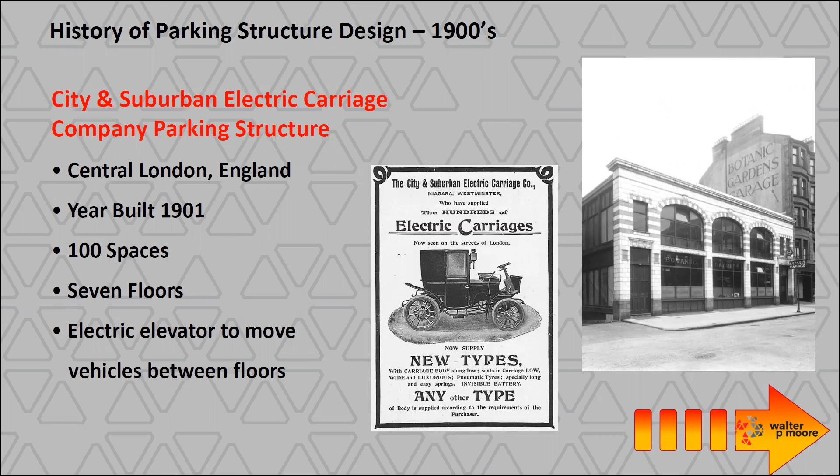In the 1930s, we see some of our first elevator type garages. They had mechanical lift elevator type systems, and this one may be one of the very first repurposed parking structures.

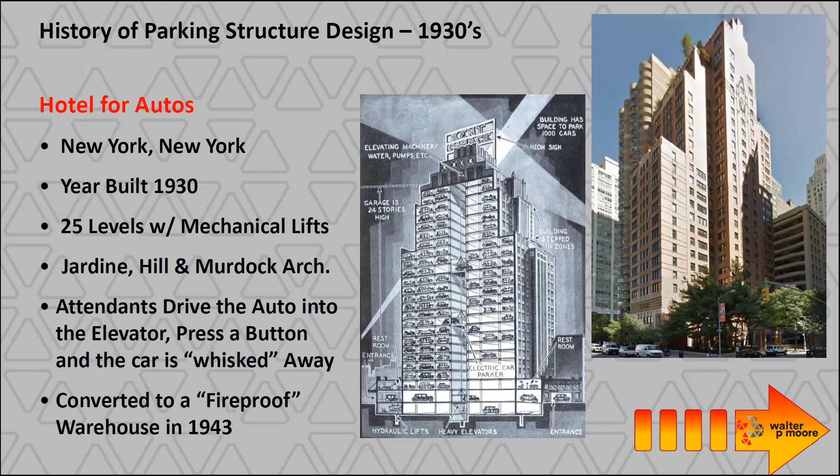In the 50s, we see more of a traditional approach to garage design. Basically, self-parking was introduced, vehicular ramps for interfloor travel. Although it wasn't the most efficient parking structure, you could really start to see some of the familiar cues with today's parking garages.

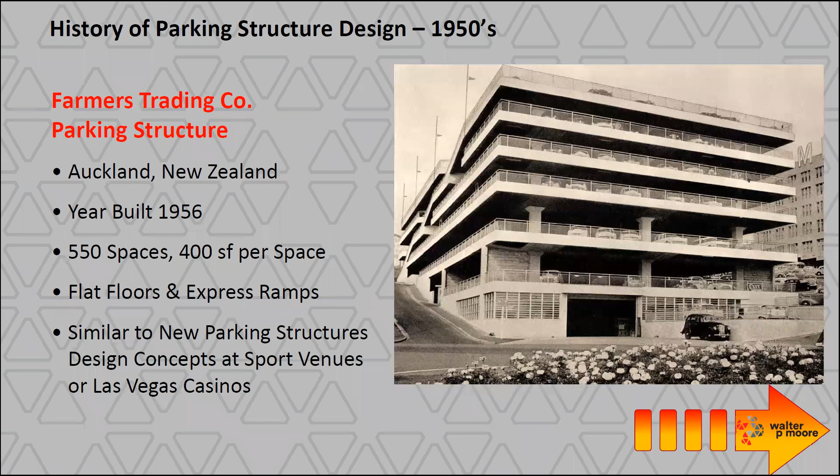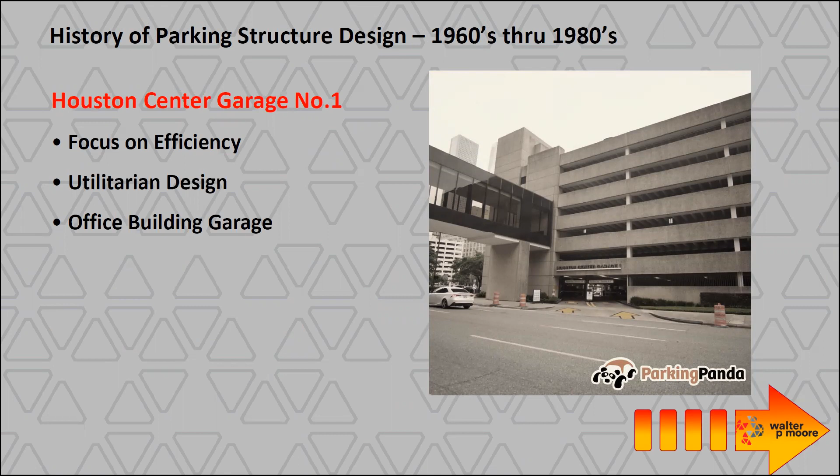In the 60s through the 80s, we saw a proliferation of highly efficient office building type garages, very utilitarian in design, pretty much serving one single purpose: to park cars in a concrete box. We also start to see some breakthroughs with long span construction to increase efficiency and, you guessed it, park more cars.

In the next 20-year period, we really see that although efficiency was still a driver, garage design became a little bit smarter. And we really saw this mass adoption of what we call level of service design approach.

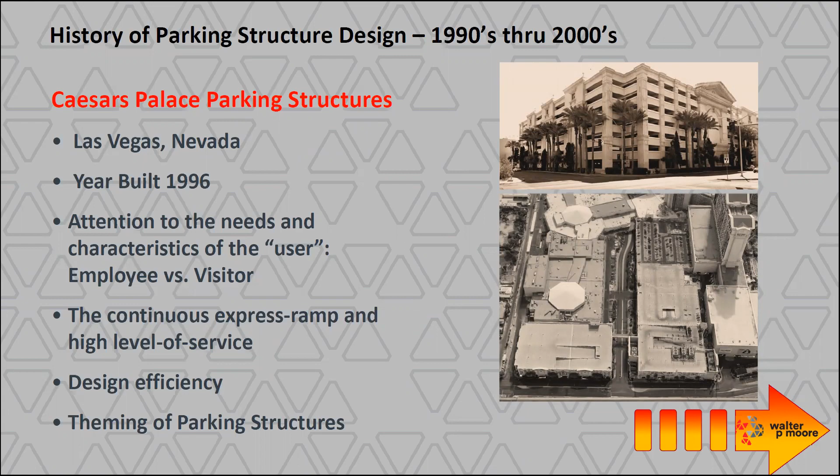Now we arrive at the modern era of parking structure facility design. We see structures that are part of the community, multi-use, integrated with other buildings. Many have sustainable features. Some are part of multimodal and transit-oriented development, and many incorporate technology to increase utilization, enhance wayfinding, and provide an overall higher level of service. And finally, we see a recent trend toward adaptable parking structures that can be designed to be repurposed to another use in the future.

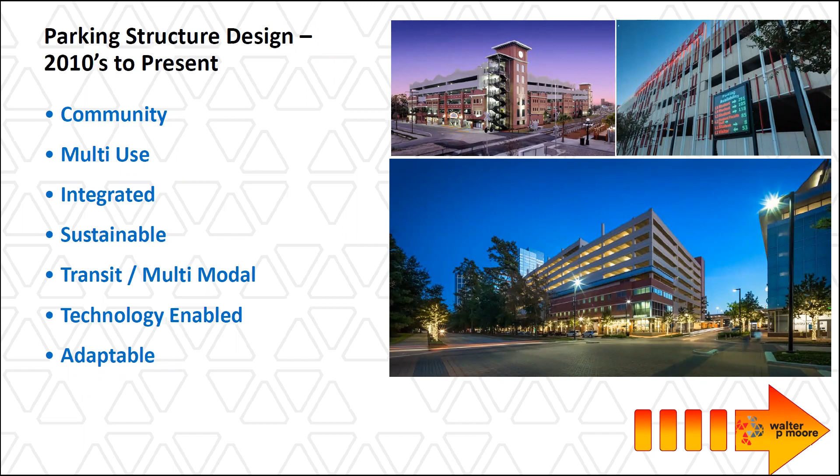Now let's go into a few modern examples that implement some of these strategies and trends that we spoke about. First example is Midtown Park Garage, located here in Houston. This overall project is a great example of how a new development with public space and, of course, parking can become the center of activity in the area. Midtown Garage is an underground garage that spans almost the entire 6-acre development, and it provides around 400 parking spaces for a variety of user groups.

Public, event, commuter parking, because it's adjacent to the Metro McGowen Station Rail, as well as the ability to support future retail on the site. And finally, the park and garage design work together with on-site water management, which is a sustainable feature for the garage. There's a 70,000 gallon water vault that was built within the garage construction footprint to capture both the park and the garage drainage, and then reuse that for the irrigation of the park.

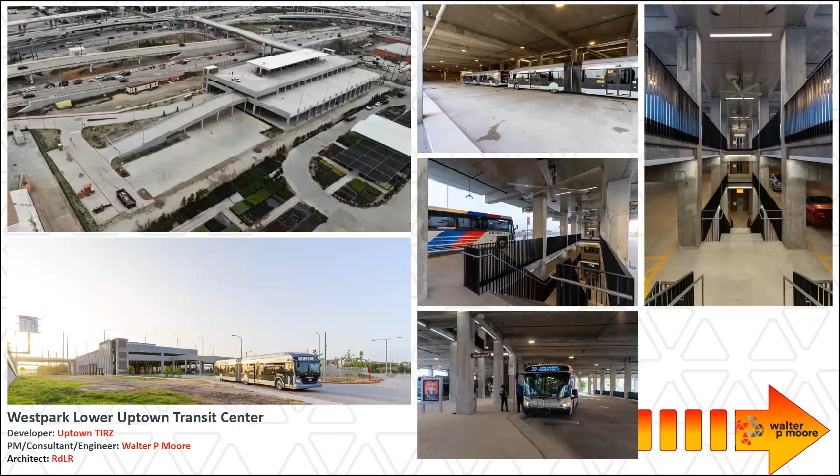A different type of trend we're seeing is parking structures that are part of a transit-oriented development, or in the case of Westpark Lower Uptown Transit Center, that are part of a multimodal hub. You have two modes of bus service, park and ride coming from the US 59 HOV, shown in the upper left-hand picture. Buses circulate on the 3rd level of the transit center. The lowest level has local bus service, which supports the newly opened Uptown BRT, and the 2nd level is an integrated commuter parking garage. The transit center also has accommodations in the way it was designed to receive other modes of transportation in the future.

This project example shows more of an urban trend we're seeing: integrated parking with another building type, in this case an office tower and retail. Bank of America Tower in downtown Houston has an integrated 1,300 space garage that's both under the tower, a podium type structure, and a large portion outside the tower footprint. This was done to allow the project to be built in phases. The first phase, the standalone garage, came online a few years before the portion under the tower. This strategy was used by the developer to start generating revenue sooner. Additionally, the garage has multi-purpose components like retail on the ground floor and a green patio space on the roof.

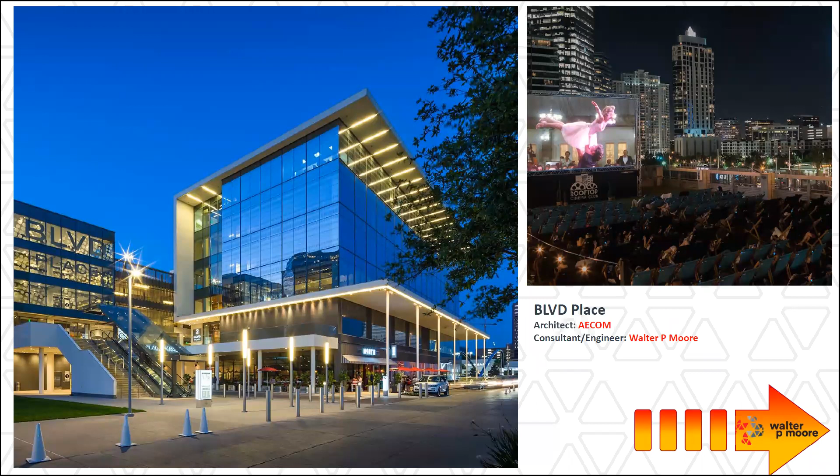The next example is a parking structure at the Boulevard Place development in the Uptown area. The garage serves a mixed-use development and utilizes the roof of the garage as a cinema club. Really, really cool idea.

The final example of using a garage in an integrated fashion within a development is University of Houston Garage 5, the Elgin Street Garage. It's 2,500 spaces that serve staff, visitor, and student parking needs, but also serves the needs of the new architecture and art school building sharing the same footprint on the same parcel of land. The multifunction space includes an art gallery and the school's maker space, so you can watch art being made through a glass enclosure open to the adjacent loop road sidewalk pedestrian realm. Additionally, it utilizes a parking count and guidance system to enhance wayfinding and increase utilization. Finally, the garage drainage system was designed to flow into a bioswale that supports low impact design for storm water quality management.

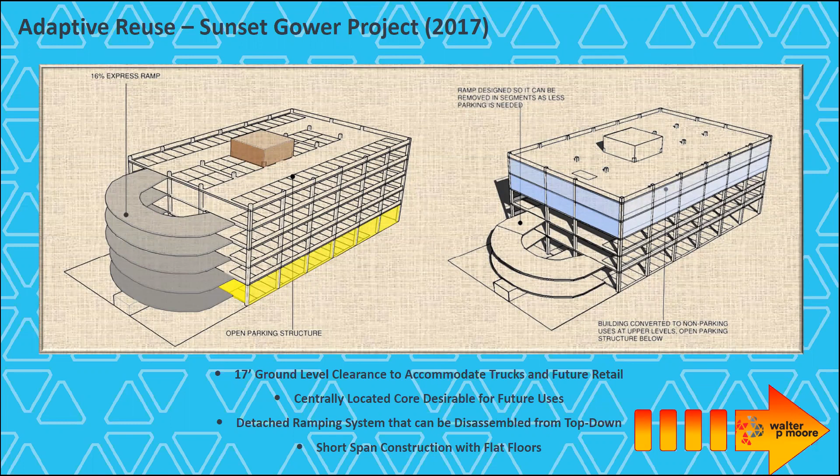The great thing about this approach is that the potential reclaimed floors are all flat, there's no ramps, and you have alignment with the structural grid and cores.

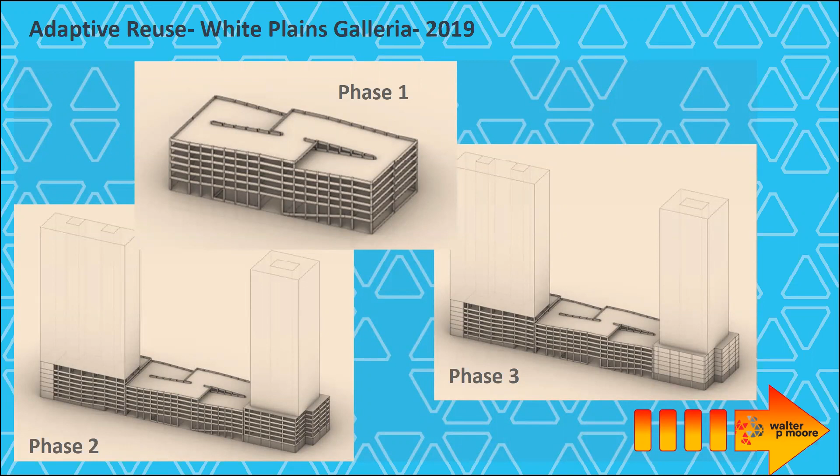There are many considerations. I won't go over them all, but this list is by no means comprehensive. However, it can be done.

This is an example, the FIU parking garage. It was designed to have the entire bay convert to classroom space as the need for it grew.

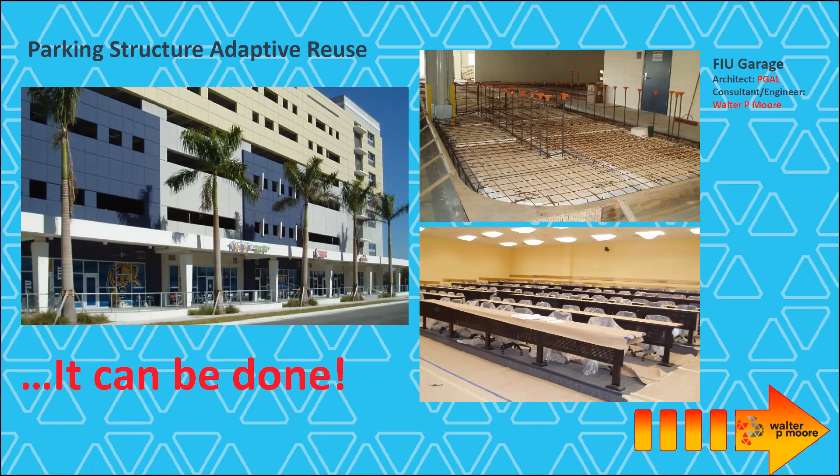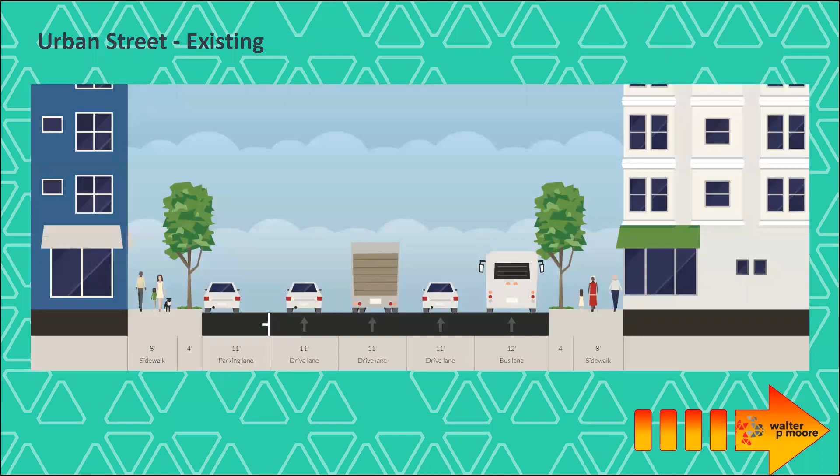Now let's quickly look at potential impacts of autonomous vehicles to our urban landscape. This sketch is of a common city street with many lanes of traffic and small pedestrian walkways.

Now, as we move more toward walkable space in urban areas, AVs start to come online, and maybe this is what the streetscape of the future could look like: fewer autos, auto lanes that could be skinnier, AV-only lanes. It's sustainable, greener, healthier, and certainly something to think about.

However, what we don't want to do is create a situation where we lose the battle with control over our shared curb space and create chaos. Maria, what are your thoughts on the importance of shared curb space?

Thanks, Brian. Thanks so much. I'm excited to be here today. Always a good time to talk about parking. So let's just dive in.

Why is the curb a big deal? How you manage your curb can really help define your city. Do you want a city that favors sharing the streets, or one that's focused on archaic uses? The curb is a valuable, limited city asset that traditionally has never been given the love it deserves.

And this is important because, according to a UN report issued in May of 2018, urban areas hold 55% of the world's population.

By 2050, these areas are going to hold 68% of the world's population.

So cities can't keep building garages and we can't keep building curbs. The old adage, if you build it, they will come, really applies.

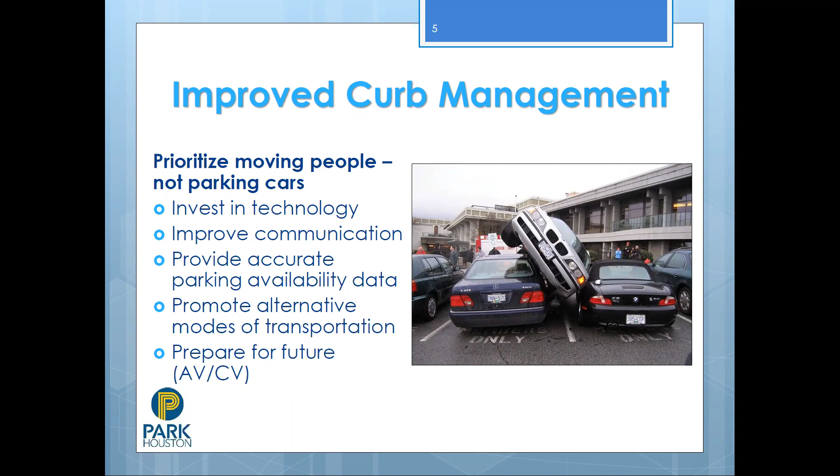So 15 years ago, the priority at the curb was protecting it for private vehicles—let's park as many privately owned vehicles as possible. Now cities have a different attitude about the curb space, and we're looking at how do we move more people, not necessarily how do we accommodate more cars. Parking privately owned vehicles is the least important use for that curb. Looking forward, that's going to continue to drop in priority as we seek to accommodate an increasing number of delivery vehicles and TNCs, and then eventually accommodate the autonomous vehicles that are headed our way.

So in the age of COVID, parking is not as challenging, and cities have taken this time to try new things with less constraint because now we don't have so much demand for the curb space. For example, many cities are experimenting with pickup and drop-off areas for restaurants that were impacted by the pandemic. We took metered parking spaces and replaced those with pickup zones so that customers can easily access their restaurants, grab their takeout, and get out of there quickly.

Some cities had started in this direction prior to the pandemic, but under the guise of having rideshare zones on the street. Clearly the pandemic made this practice more acceptable since people were not demanding that curbside as much. In Houston, we went live with some rideshare only zones in March of 2020, so the timing was not great. We converted public parking spaces—in some cases entire blocks—to rideshare only zones to accommodate the TNCs that were struggling to find curb space to safely pick up and drop off passengers in the Central Business District. In this instance, usage of the curb for rideshare was about safely getting people to their final destination or getting them to the TNC to go home.

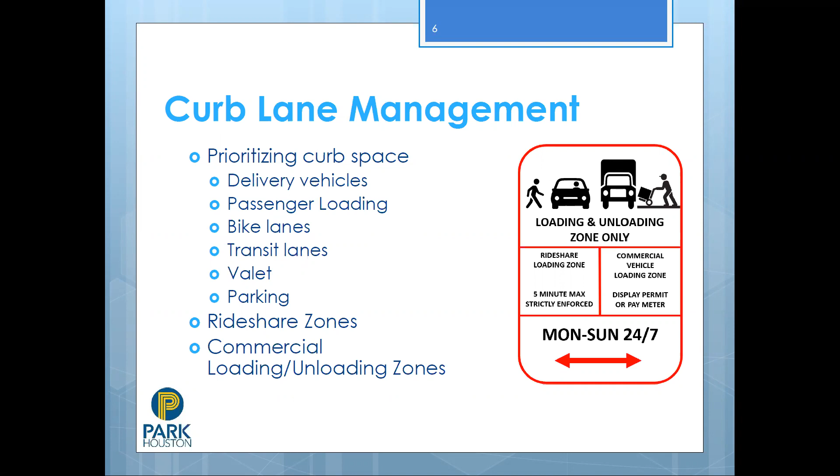We worked with the TNCs to geofence, so much like an airport, you'd walk out of your restaurant or out of the bar and call your Lyft or your Uber, and it would direct you to the zone we set up on the street. Unfortunately, our timing was just off, and we really didn't get to test it so much because the same week we went live—I think a week later—the stay-at-home order for Houston was put in place. So hopefully we're going to try and see how we can test that whenever we get to whatever this new normal is post-COVID.

So to prepare for the future, cities are looking to digitize their curbs. This is a digital tool that maps out in great detail how curb spaces can be used across the city. It would also allow street users to better understand how to use this infrastructure. And in the future, most importantly, it's going to form the backbone of crucial data that programmers can feed to connected or autonomous vehicles so they understand not only how to navigate our streets, but also how and when and where they can pull over and use the curbs.

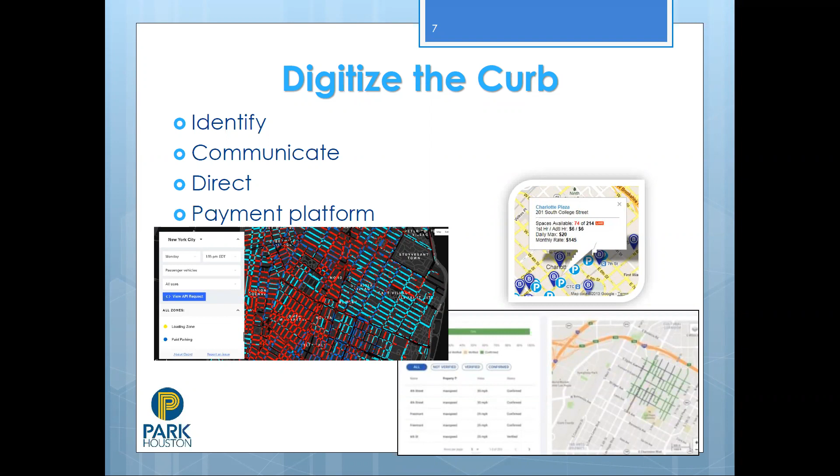In parking, we have really limited real estate to communicate with our customers—it's really just a sign on a post that we put on the side of the street, and most of the time is that sign even being read? But how neat is it going to be when a connected vehicle drives into your central business district and the vehicle knows that the empty space it just passed is reserved for commercial deliveries, but that one block over is a street that has metered parking available for its use? Do you even need to think about signs anymore? Just thinking about ideas like this is really exciting, thinking about connected vehicles coming.

So now you've digitized your curb and your customers can use an app to find available parking because you're also pushing your availability that you're getting from your smart meters to this app. So the next thing you want to do is integrate a payment platform. And Brian touched on this earlier.

You can have a pay by phone app or pay by cell app for your customers so they can pay the meters and find and pay for parking in one app. We're always going to have to pay for parking in some form or fashion, but what COVID demonstrated is that payment by app quells fears in the public, and moving forward, if a city has not adopted pay by app, they need to get that done.

But more so, what cities should also be looking at is having multiple vendors who offer pay by app. Currently, most cities, Houston included, select one pay by app operator, and our customers are required to use that app.

So we've created a monopoly in our city. But when we put a parking meter on the street, we don't say it's a Visa only parking meter or a MasterCard only parking meter. We take Discover, Amex, Visa, MasterCard, all the coins, all the bills. So cities need to offer their customers as many payment methods as possible. Why should we only limit ourselves to one app provider? Let the customer decide what they want to use. And also, you get the vendors competing against each other to get the customers.

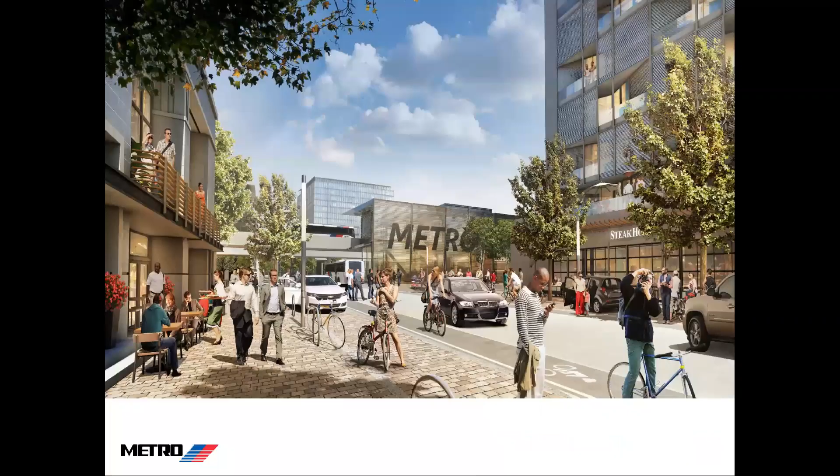This is a visualization of the Addicks park and ride. This isn't what Addicks looks like right now, but it could look like this potentially in the future.

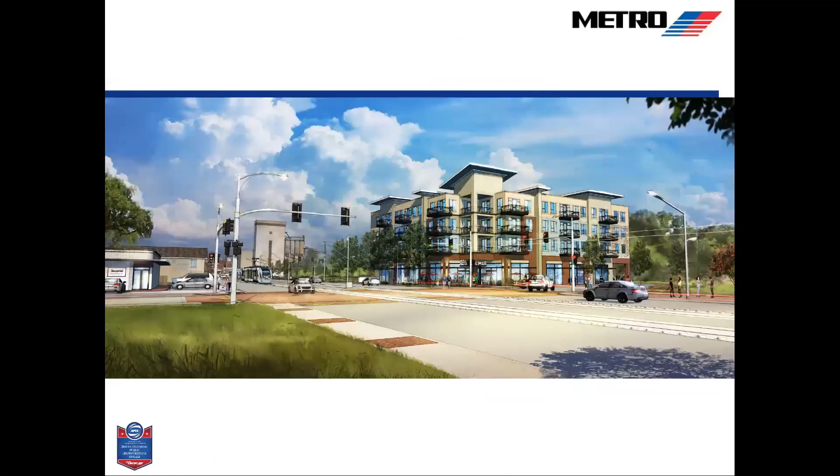Or how could we get from here? This is a visualization of potential development that could happen along one of our light rail lines, where we don't own real estate but we have the transit. This is in and around the Coffee Plant station, and you can see that in the background.

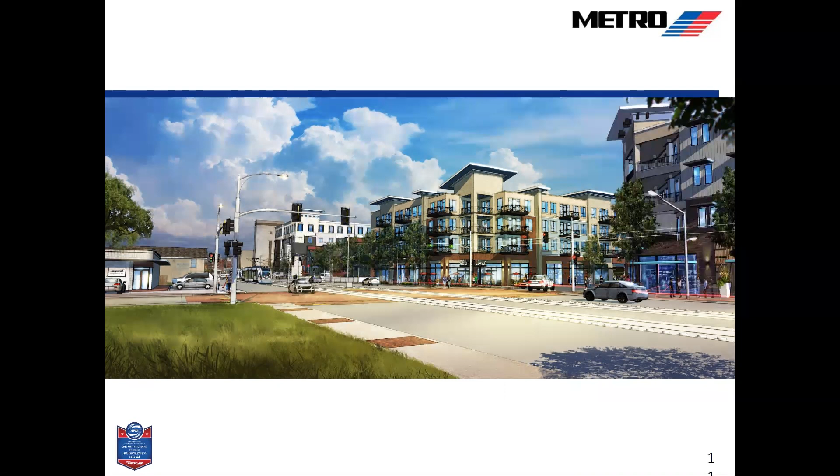This is a simulation of what densification or development around one of our light rail stations could look like. These are just two cases: the park and ride, where Metro actually owns real estate, and around a light rail station, where we bring the transit, and the transit is what induces or is a big factor in inducing development and higher densities around the transit station.

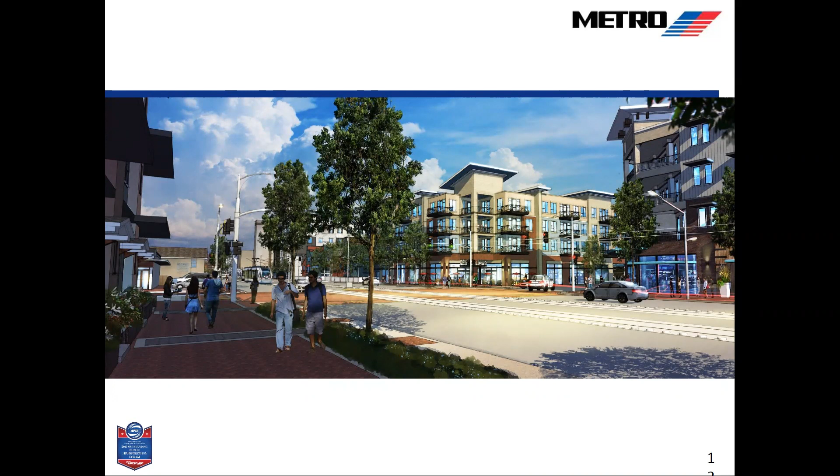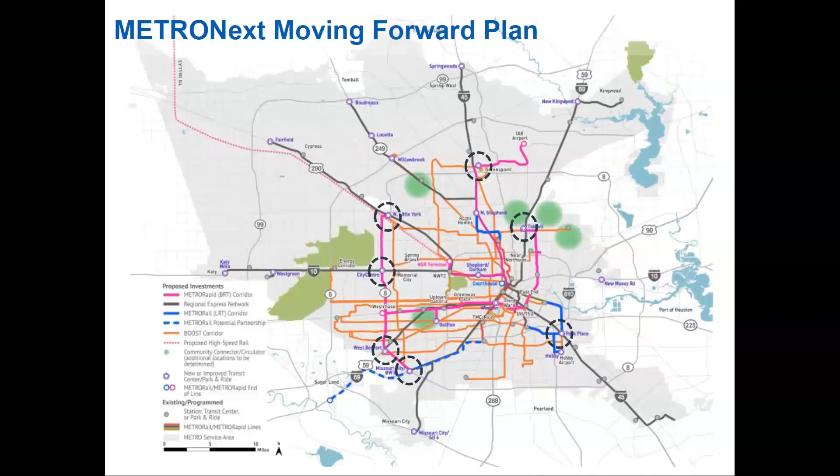So this was a very deliberate part of the METRONext moving forward plan. The way we can think about development around these hubs is that parking is one of the amenities, but it also becomes part of a set of amenities and livability principles that can develop at these locations.

I wanted to share some of the work Metro has done around this, which we call transit-oriented development. We took a look at some of the real estate we own, like the Addicks Park and Ride, and went through this exercise working with the City of Houston and H-GAC. We looked at some of our light rail stations as well as our park and ride locations, and went through this exercise of looking at how these could potentially be developed.

In the next couple of slides, I won't get into the details of the analysis, but we took a look at existing land uses, this is again the Kuykendahl Park and Ride. If we have these land uses of multifamily residential, commercial, and retail, what kind of land uses could one expect? What are some of the development trends we're seeing? What are the population and employment demographic trends, and how could all of that tie together into developing a program of spaces around the park and ride? That was some of the analysis that went into this work.

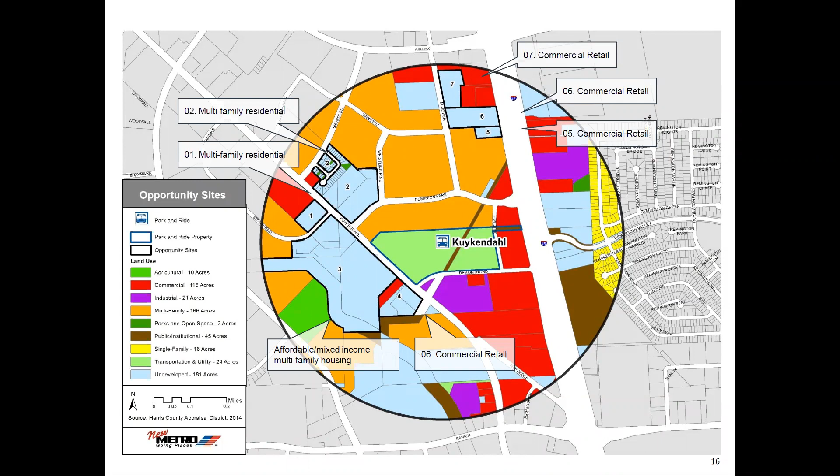We also thought about what are some of the gaps in our existing first and last mile networks, and how improvements could help connect all of these users together.

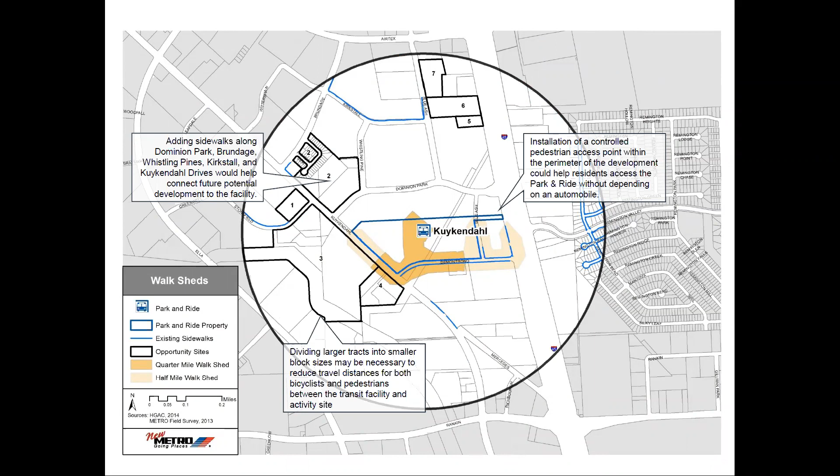The big takeaway from our park and ride networks and our TOD study was that a transit agency brings the transit to the equation, but at the end of the day it's the art and science of development where you have to bring multiple actors together. You have to identify a diverse set of stakeholders in terms of partnerships, think about development that is transit supportive, and connect multiple modes while leveraging our investment. It's a whole program with multiple actors needed to develop these livable centers and multimodal hubs.

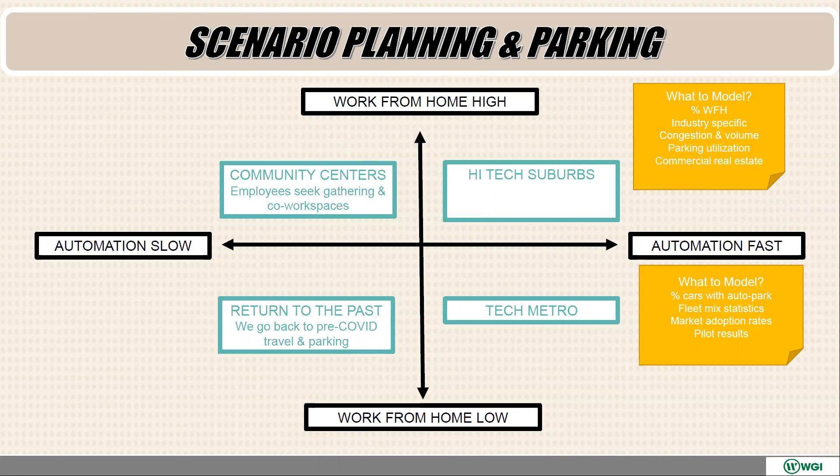I actually like technology foresight, because that's really where you're pulling out the crystal ball. As I said, a lot about technology—the real thing that matters is market adoption, and really, how are consumers reacting?

Because 57 to 75%, depending on which poll you look at, of consumers say they will never get into an autonomous vehicle. So we've got to factor those things in, but in a phased manner.

So for parking, we've got our traditional lots, and with trending, we've got a lot of smart parking, a lot of payment systems. In the emerging field, we're testing autonomous garages and self-park. And then, of course, in the future, we think about summoning from remote spaces.

But the critical thing about technology foresight is you have all these different interlinked technologies evolving on their own timeframes, but they still interact, with feedback loops in how they interlink. So if you're a regional modeler, say at H-GAC, this is kind of what you're going to be looking at.

Because the autonomous cars and the autonomous parking may be evolving at different sorts of phases, how do you work with garage owners, and how do you phase in the way that cars are parked and how they approach these garages? Or maybe even autonomous cars don't even go to some garages but go to others.

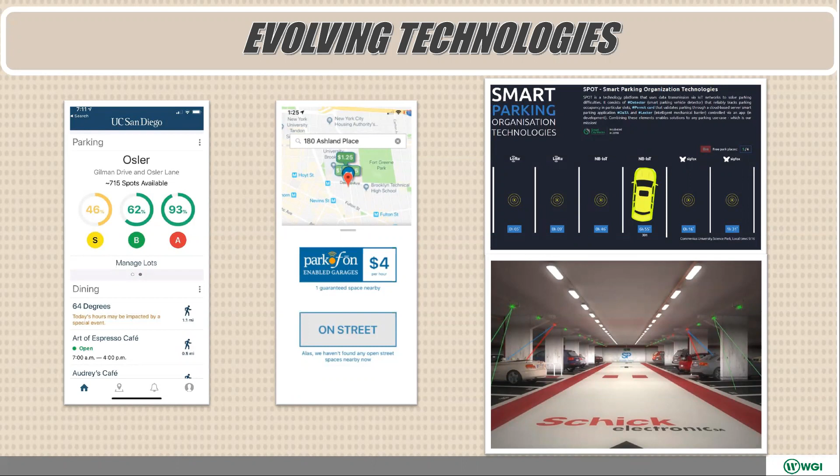I do want to point out self-parking cars, because these could really be a game changer the way the math works out. Some professors looked at an optimal layout and found that some of these lots or garages could decrease the space needed by 62% and even higher. It's just a way of getting cars that you can program to move in and out of spaces to make room and allow those other cars, almost like a puzzle, to start to get into the spaces.

So let's talk a little bit about e-commerce, because this has a lot of implications for parking, but in different ways. I thought I'd start by looking at the traditional supply chain: factories or ports if you have imported goods that go to a distributor. Then you're talking about trucking and truck parking, which is a big deal for a lot of truckers, especially because they have to meet federal standards on how many hours a day they can be in operation. Then from the distribution to the retail store, that's where we've got all those shoppers coming, and that's what drives a lot of these surface parking lots, because we've got standards from the Institute of Transportation Engineers and other associations that tell us how much parking we need.